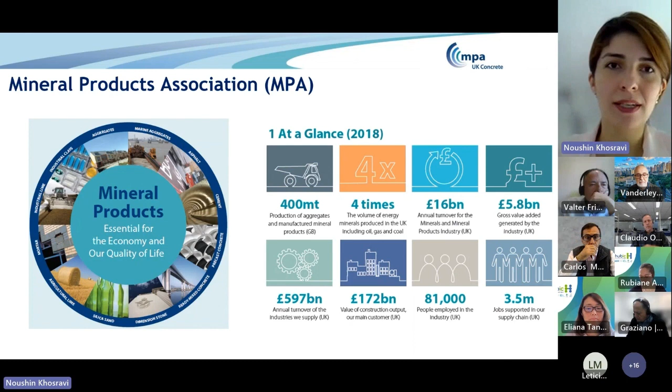Just covering a bit of basics - what is Mineral Products Association? For those who haven't come across MPA, we are the UK Trade Association for aggregate, asphalt, cement, concrete, dimension stone, lime, mortar, and silica sand industries. We have a growing membership of 530 companies, vast majority of SMEs, quarrying companies. We cover 100% of UK cement and lime production, 90% of aggregate production, and 70% of ready mix and also precast. As you can see, an important industry in terms of economy as well.

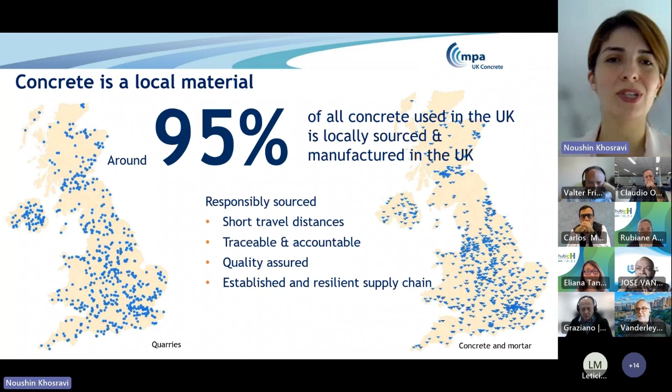Why UK concrete is really important - and I'm sure it's the same in many countries - concrete is a local material. This is important context because it has a domestic market, and it's a supply chain that is verifiable and responsibly sourced. What I mean by responsibly sourced, we can control the quality, we can avoid slavery, we can have good control of the supply chain. In terms of travel distances, it's very short, it's traceable, it's accountable, and it's everywhere within the UK basically. You can see on the map the dots showing where the industry sits. So UK concrete is a key part of the wider mineral product industry, contributes 5.8 billion to UK GDP, directly employs 81,000 people, and supports 3.5 million jobs.

Opa, tem alguém com o microfone aberto aí? Sorry, your microphone is open. It's okay, now, sorry.

Okay, so as you can see, sustainability of concrete can be a very wide topic because it has really big social impact within the UK, both social and economic. That's why I'm going to do an overview of all sustainability sides of concrete within this presentation. Why choose concrete? Most of you here are concrete fans, into the concrete industry. It's really important to deliver new homes, schools, hospitals, infrastructure with concrete, and important to protect communities, residents and buildings against threats of fire, flooding and changing climate. As I mentioned, it's sustainable, local, responsibly sourced, and really important for the UK economy. It can also play a role in innovation and advancement of technologies. Other benefits include climate change mitigation, sound insulation, thermal performance, and many others. So it's really, really important material.

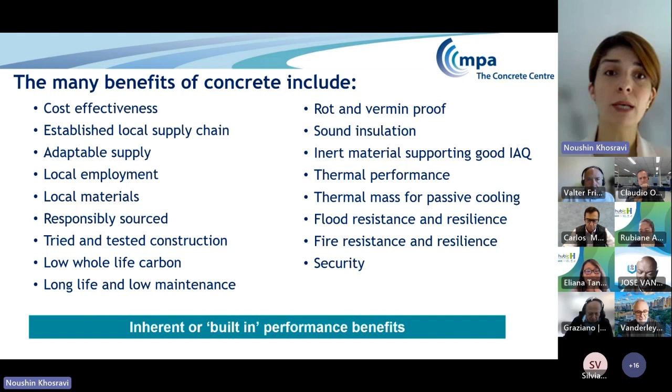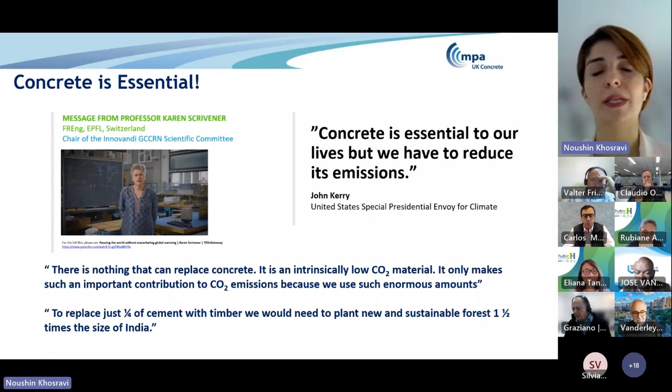I'm sure you are familiar with Professor Karen Scrivener. She had a talk a while ago where she mentioned a really important point: there is nothing that can replace concrete. It is intrinsically a low CO2 material - it only makes such an important contribution to CO2 emissions because we use such an enormous amount of it, which is really true. The volume we use makes concrete the second most used material in the world. She had an estimation: if you want to replace 1/4 of cement with timber, you need to plant new and sustainable forests 1.5 times the size of India. So we really don't have any other option rather than concrete at the moment. It's important to focus on its sustainability aspect, make it more sustainable, and reduce its emissions as much as possible.

So what did the UK do in general? From 2008, the UK concrete industry agreed a sustainability strategy and committed to deliver targets based on that strategy. The strategy evolved in 2012 and set targets for 2020, and at the moment we are working on targets for 2030. It's important as a trade association, as industry, to have these commitments, reporting and vision in place in order to measure, deliver, and plan for actions. The reporting side and the data is really a foundation for sustainability and any action we want to take forward. From 2008, the industry started to report on many different indicators.

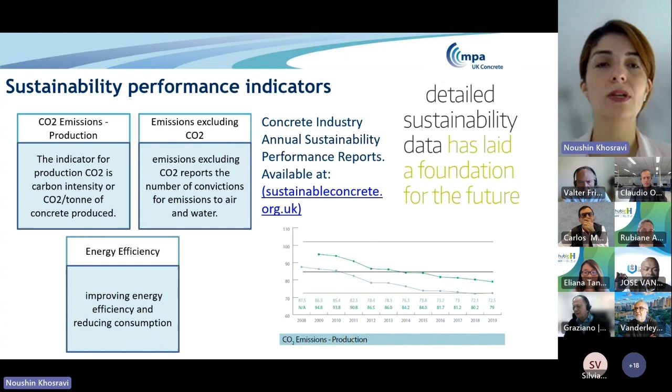I'm not going to go into detail on the indicators, just mentioning them basically. So the carbon emission and production, and emissions excluding CO2, as you can see in the graph, that's how we can show how the industry from that time has started to reduce its carbon emission, energy efficiency, and other sorts of indicators.

So these are more energy and carbon indicators, but it went further than that. We looked at environmental management systems, how we are reporting environmental management, what certifications exist, and how manufacturers can improve in terms of environmental management.

Resource efficiency - at the time, the concepts of circular economy that we are becoming more familiar with now didn't exist as much. So most concepts related to circular economy were defined here under the wording of resource efficiency and waste minimization, and that's how the industry started to measure its performance in terms of efficiency and waste.

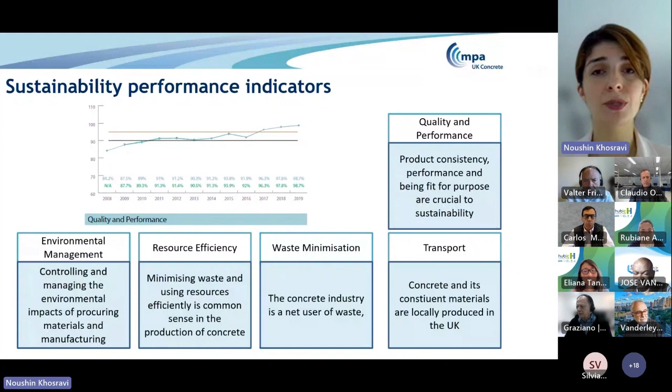And quality - transport is really important for emissions, especially on the aggregate side. And then water and biodiversity, again especially for the quarrying side of concrete production, a really important parameter. There's been great success through time with quarry restoration programs and achieving biodiversity net gain at the end of the quarrying program, which the industry has been reporting on.

Responsible sourcing, employment and skills, health and safety, and local community - also the social aspects of the indicators. In the UK we have BES 6001, which is a standard for responsible sourcing of material, and a lot of reporting has been done based on that.

So having said that we have been reporting on sustainability aspects and everything, obviously the commitment we have for reducing emissions is really significant and we are taking it seriously. So we are making more commitments to go forward.

Looking at carbon emissions specifically, a reduction in absolute CO2 emissions has happened since 1990, about 53%. If you look at the graph, this is more than the whole economy in the UK, which has been 43% at the 2018 baseline. The graph on the right shows the global contribution of the cement and concrete industry to emissions is about 7 to 8%, but in the UK it's about 1.5% - still a big contribution, but slightly less than the global figure.

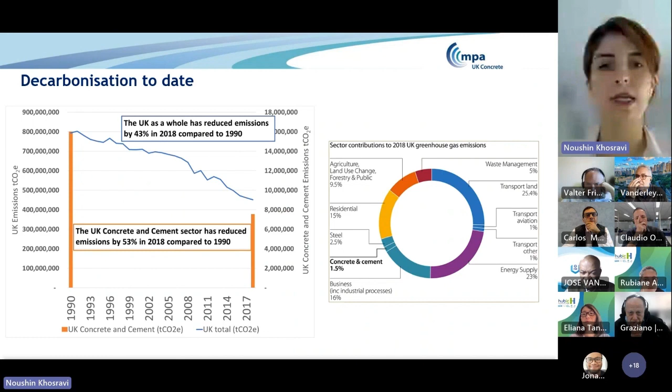This has happened through a lot of efficiency changes, changes in technology, cement production, and using supplementary cementitious material. But the industry knows we have a big challenge with process emissions in place, and there is still a lot to do to reduce emissions from cement production and concrete production.

I'm not going to explain how we produce cement - I'm sure people in the room are familiar with cement production. What I mean by process emissions is what happens when we heat calcium carbonate and the carbon side of it is emitted, and we can't really do much about that process side of it at the moment.

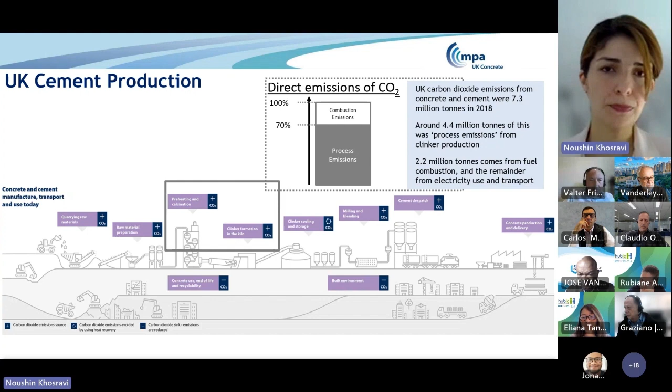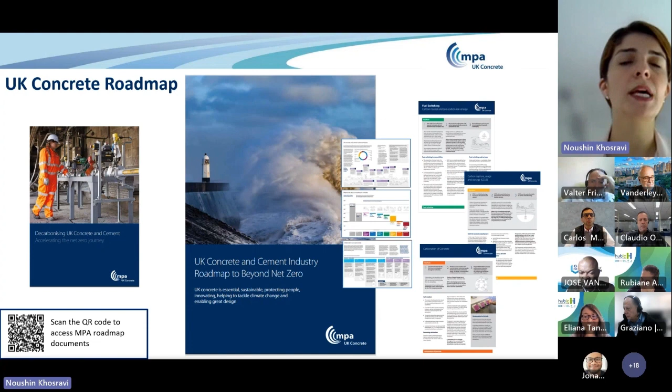But there's a combustion emission side of it where a lot is happening at the moment. So the UK Concrete Roadmap was published in 2020 with many lever papers explaining each part of it. If you look at the roadmap, it has 7 levers to go beyond net zero.

The levers are about indirect emissions from electricity, transport, low carbon cement and concrete, fuel switching, carbon capture, and then looking at the beyond-zero benefits of concrete, which is carbonation and thermal mass.

What I mean by beyond zero is that we are not counting the benefits of concrete in terms of carbonation for achieving net zero within the UK. But we know other roadmaps, like the GCCA roadmap, do include that carbonation.

Also, different roadmaps might have other levers, like efficiencies in structural design and construction, but this roadmap is very much focused on the manufacturing side and what can happen within the MPA environment. But we shouldn't ignore the other carbon reductions that can happen within the construction industry.

What I'm going to focus on here is more about the low carbon concrete side of it and fuel switching. Indirect emissions from electricity and transport are really important, but it really depends on government and availability of renewable energy in the grid to be able to use electricity, and also a lot of transport infrastructure is required to make that change.

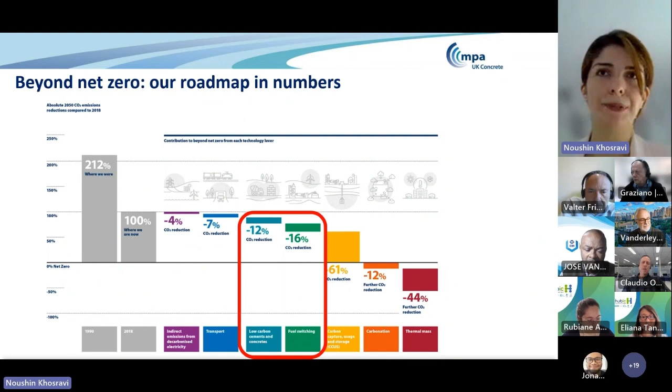If I focus on fuel switching, the fuel for producing cement is coming from fossil or waste biomass at the moment. 45% of thermal input to UK kilns is provided by waste-derived fuels, including waste fossil and waste biomass. 18.5% of thermal input to UK kilns is provided by waste biomass, and 609,000 tons of waste-derived fuels were consumed by the UK cement sector in 2021. This is important to consider both from the point of carbon emissions and from contributing to resolving the problem of waste in the country.

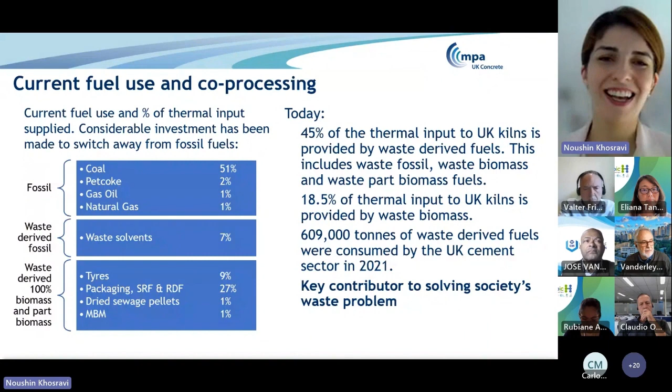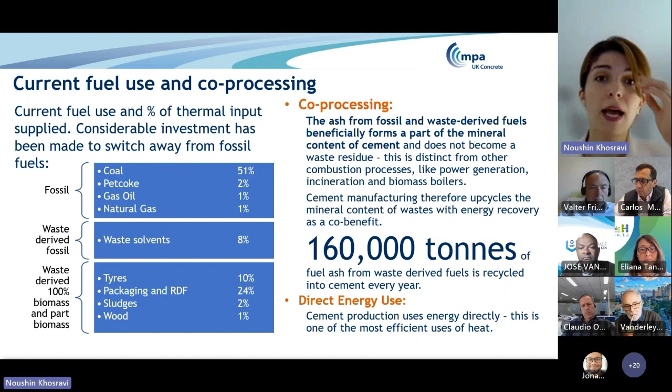There is also the co-processing side of it, which I think is more important from a circular economy point of view - the ash from fossil and waste fuels beneficially forms part of the mineral content of cement and does not become a waste residue. So there is basically almost no waste from cement production, and cement manufacturing therefore upcycles the mineral content of waste with energy recovery as a co-benefit. This is the number you can see about the tons of fuel ash from waste fuel recycled into the cement.

These are examples of some fuel switching and what type of materials at the moment are being used as waste in the program of fuel switching.

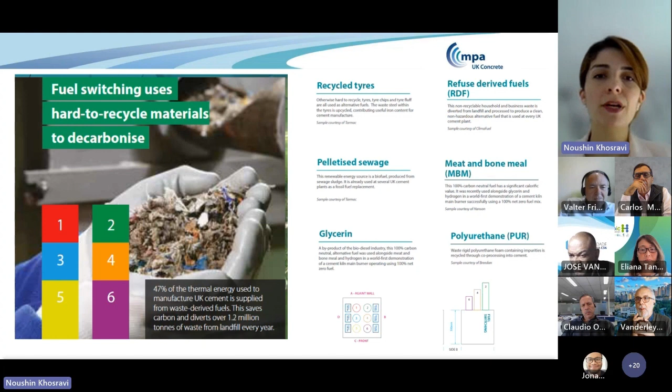But another side of fuel switching, if you want to see how that 16% reduction might happen - there are different aspects in there. There should be the supply of waste biomass available, so the roadmap expects 70% waste biomass will be available. Then efficiency of production and manufacturing is really important. And the infrastructure, especially for delivering hydrogen, should be there to enable that fuel switching to happen. If these things are in place, we believe by 2050 there will be a 16% reduction of emissions through just fuel switching.

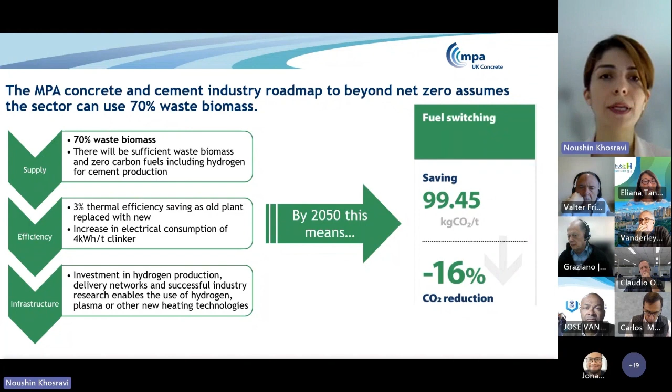How are we helping this to happen more? With partners, we had some trials going on with government-funded funding, partially for hydrogen, using hydrogen for basically producing cement. This was, and also plasma. This was a good demonstration that it is possible, but it also highlighted a range of challenges about hydrogen delivery and the efficiency of using hydrogen. We know the availability of the right type of hydrogen needs to be in place to make it happen. But this is a good step to show that it is possible for the industry to switch to using hydrogen. Then the rest is about having the infrastructure in place to make it happen.

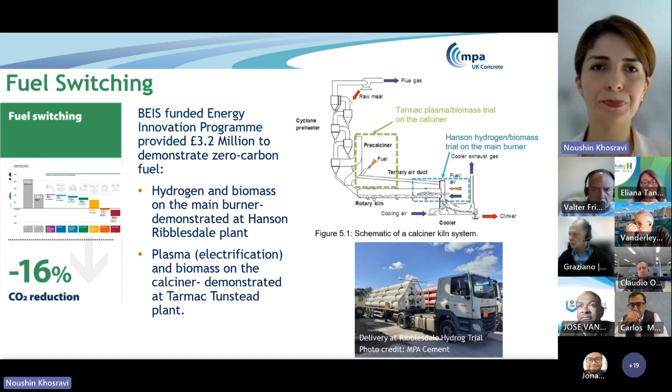If I move on to low carbon cement and concrete, as an overview, it's about clinker content, it's about innovation and research being in place, and how we work with the standards, how we can replace some of the cement - CEM1 as we call it in the UK - with other supplementary materials or additions, and how we help innovation go forward. We expect 12%, or actually even more we guess, will happen through using this lever.

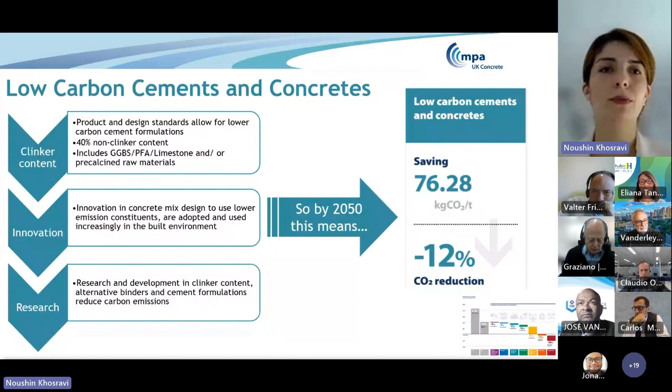I'm going to go into more detail about this. For low carbon concrete production and use, there are different aspects or elements to it. One will be supplementary cementitious material, alternative clinkers, how specifications and standards will keep up. Then efficiencies in design and construction, benchmarking and definition, and procurement policies that need to be in place. These two - efficiencies and benchmarking - as I mentioned, are not covered in the MPA roadmap, but there is the ICE low carbon concrete group, which we have been heavily involved with. We call it the low carbon concrete routemap. That covers that side of it. I'm going to explain about it in the next few slides.

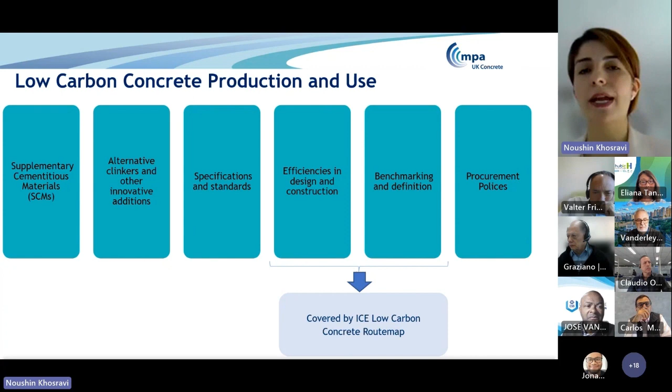Starting from supplementary cementitious materials, everybody knows that the highest emissions are coming from the cement side of it, and also reinforcement. The figures that I've mentioned here are slightly old.

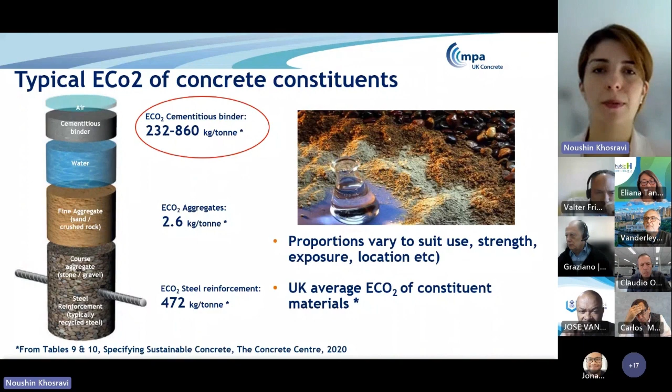We have recently published a new sector EPD - our average sector EPD for cement is 840, and the steel reinforcement figures are also changing and are lower. The new updated figures will be updated in our documents by the end of the year.

Using secondary cementitious materials, like fly ash, GGBS, limestone, you can see all the figures of the carbon emission are much lower.

There are lots of discussions about whether the figure of GGBS should include economic allocation from steel. This is an ongoing conversation within the UK. I think by the end of the year we will have a new, higher value for embodied carbon of GGBS, but that value will still be much lower than what we have for CEM1.

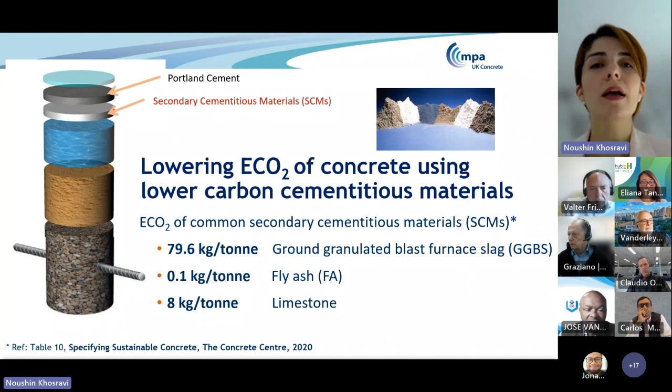So it still makes sense to use GGBS in concrete for reducing carbon. Looking at typical UK cement blends allowed in the standard at the moment - it depends how you compare it. If you're comparing with CEM1, there's a lot of opportunity: already 65% cement replacement is possible, with significant carbon reduction.

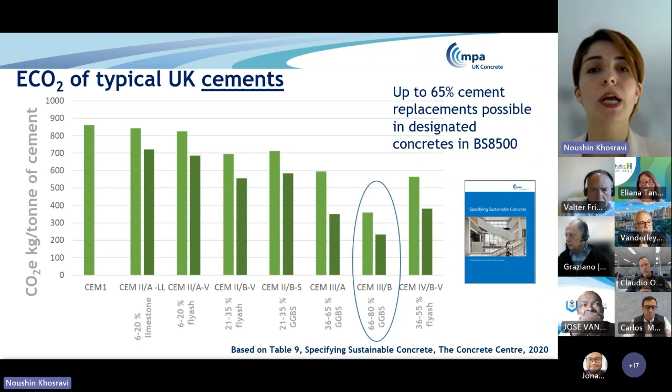But we know we are relying a lot on GGBS and fly ash, and we need to change the standards and work more to find other sources of material to use in the future. That's why we are looking at what other innovative materials could be part of our large-scale recommendations to the industry - how we can choose which material is best to use.

One of the most important parts of it is raw material availability - is it from waste or coming from natural resources? We would obviously be happier if it's coming from waste streams, because then it has a good impact on the circularity of materials and we don't need to damage any natural resources.

Is it local or imported? Local obviously has benefits - it has an impact on the social aspect and reduces carbon emissions from transport. So if we can find local material, that's better.

What's the CO2 mitigation potential? What's the scalability - is it at research level, pilot, demonstration? How can we commercialize this?

What's the impact on consistency of concrete and other properties - strength gain, durability? What would be the preferred application? What would be the impact on water demand and energy demand? How can we change the standards to make people use it? And what would be the impact on cost?

So there are a lot of criteria to really be able to recommend another addition or supplementary cementitious material to the market in the UK.

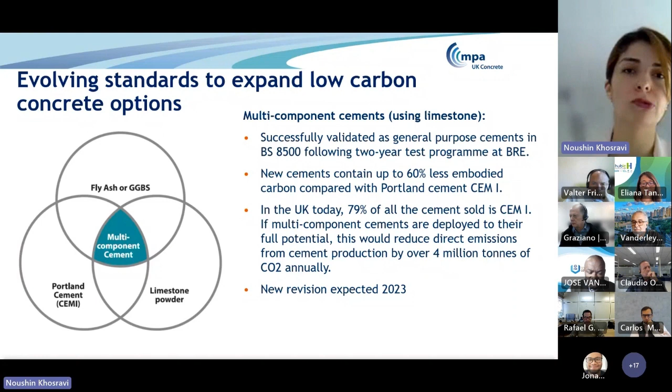Another project we are working on is reclaimed calcined clay cement. As I mentioned, we would like to use waste streams as much as possible, so this project is looking at clays from waste, from demolition, bricks, and seeing what would be the source of clay that we can use within the UK.

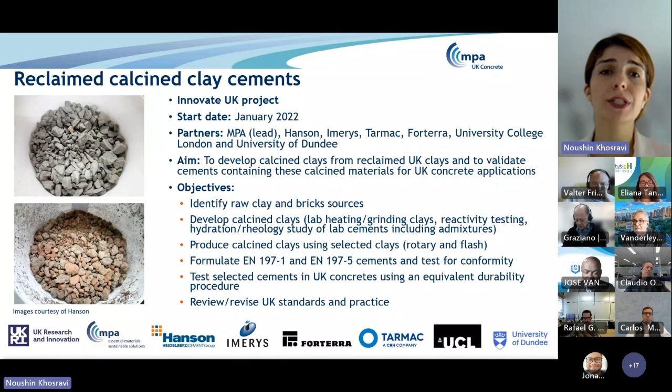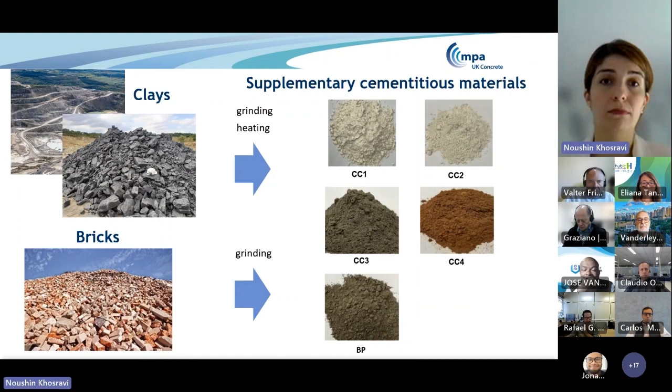We are looking at 10 different sources of clay and starting to understand their characteristics and the grinding process, heating, reactivity, and all sorts of tests that we need to do before being able to offer it to the market. So calcination and recycling is happening, and we completed the calcination.

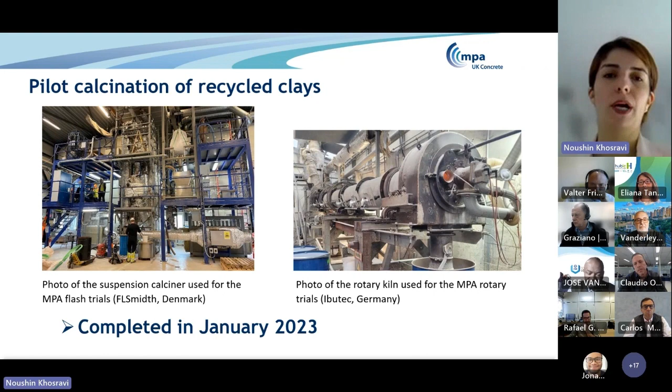The flash calcination or the rotary trial were all finished in January 2023. Now we will start a phase of durability testing to see what would be the impact and what proportions of clays we can use for achieving the right durability of the material.

So reclaimed calcine, as I mentioned, it needs a lot of work. We need to understand the characterization, the rheology, reactivity, strengths, and the impacts. It is a complicated process to find the right source of clay. But we are hoping in the next year we will finish this project and have recommendations in place about the source of clay.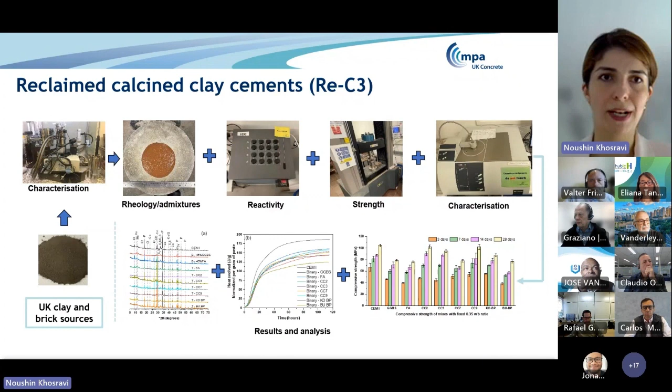Recovered PFA or fly ash is something we are also looking at. UKQAA is UK Quality Ash Association. Their estimation is over 100 million tons of recovered fly ash might be available, of which 40 million tons can have cementitious applications. So we are doing another project with University of Dundee to understand the characteristics of this stockpile fly ash and also its impact on durability. This will again open a big opportunity for using supplementary lower carbon solutions and being able to offer more options to the market.

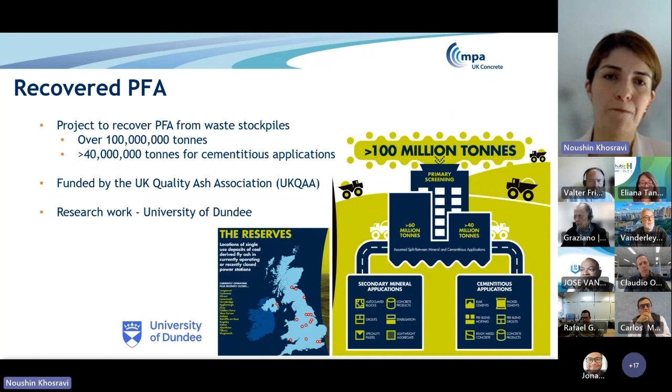Recycled building materials: EN 197 in Europe is looking at recycling cement paste. It hasn't started in the UK, but we are thinking we should look more seriously into that. I think EN 197 is looking at up to 20% replacement of cement being allowed within the standard. So we think this is a good opportunity and it's on our to-do list in the future to look at it.

Other natural pozzolans, of volcanic origin, really depend on the country. There is not much available in the UK. If anything wants to come into the UK, it will be imported from other parts of the world, and it's up to our members to decide to import it.

In terms of sedimentary products, natural clays, for example, there are major projects looking at natural clays, like London clay, as they're excavating for a project and thinking how they can use that clay. It's not within the remit of MPA at the moment, but when their project finishes, it will have an impact across the whole UK and be another offering to the market.

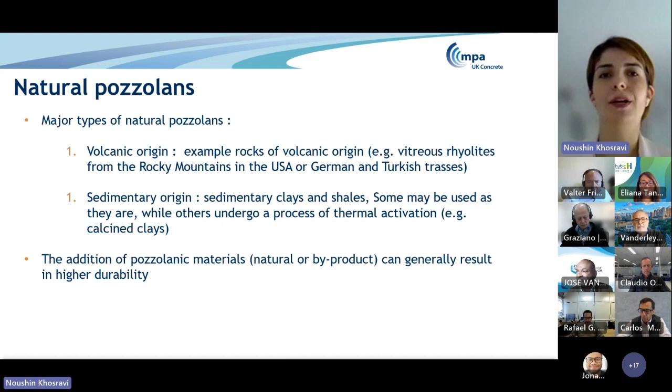Generally, natural pozzolans or even waste pozzolans, we think they will have a good impact on durability. There might be some challenges with workability and stuff, but there's not much concern about having a negative impact on performance.

So alternative clinkers or niche cements, there is a lot happening in terms of innovation in this area. Geopolymer or alkali activated binders are being used now in the UK. Many different companies are offering that. The problem with these geopolymers is the high reliance on GGBS and fly ash, but most of them are also looking at activating calcined clay, which is a more abundant material.

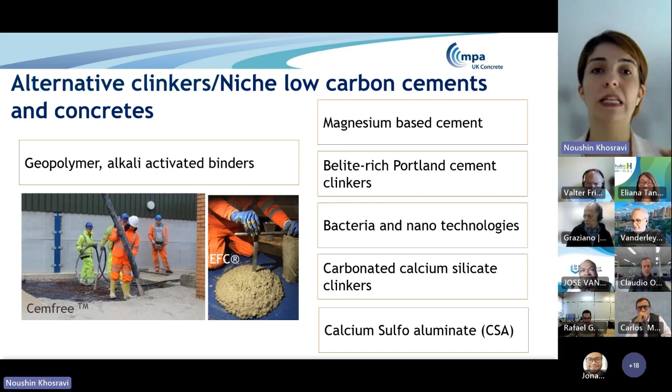But there are other alternatives. I'm not going to read the list for you, but we consider them more of a niche cement, which might have a special application. Most of them are not really commercialized yet. Having said that, we should still look at other innovative possibilities, because there is no silver bullet to resolving carbon emissions, and maybe all these bits and pieces can contribute to carbon reduction anyway.

And then there are other innovations everybody is aware of, like self-healing concrete, graphene enhanced concrete. They might not directly work in terms of carbon emissions, but they improve performance, so maybe a lower volume of concrete will be used, for example with graphene enhanced concrete. So they will have some sort of indirect impact on reducing emissions, and it's really important that as MPA we support all those innovative products coming out.

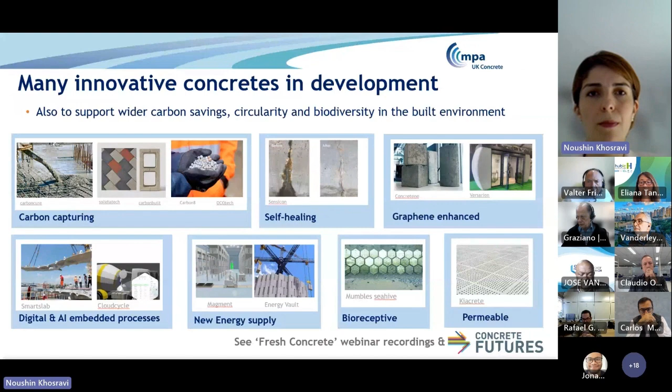So this was about the materials itself. But the specification and concrete standards are really, really important. That can actually be a major obstacle to innovative materials, because we don't have long-term performance data, and they are not compliant with European or UK code. So it's difficult to use any new material, even if they become commercialized.

That's why we think performance-based specifications are really important to replace some of the BS 8500 prescriptive approach. But the performance approach is less mature and it still needs a lot of testing.

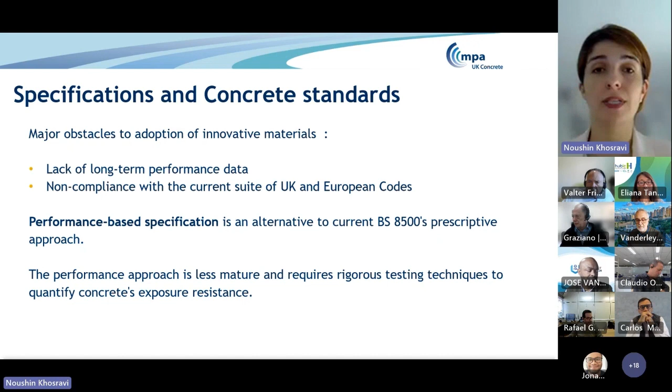So the low carbon concrete group that we are part of, and MPA Cement is also funding this work, is the BSI Flex Standard project. It's called Flex Standard because it's going to come out a little bit faster than the normal technical committee reviews that BSI standards go through. So if it's achieved consensus, then it is assumed that it's okay and it can come up.

This Flex standard is going to be a performance standard, and it's going to tell us how to demonstrate the suitability and the level of testing information required to use a new technology, a new innovative technology. Our estimation is by 2025 this standard will be available in the UK, and it will facilitate use of new technologies and lower carbon solutions which are not in the traditional UK concrete standard.

Having said that, we are developing a new standard, a performance-based specification, but we think it's really important to look at what we are using as a standard now, the BS 8500, because it was published like 20 years ago. Since then, there has been improvement, for example, in cement quality and water reducing admixtures. At the time it was written in the context of durability mainly, and carbon was not as much on the top of the agenda.

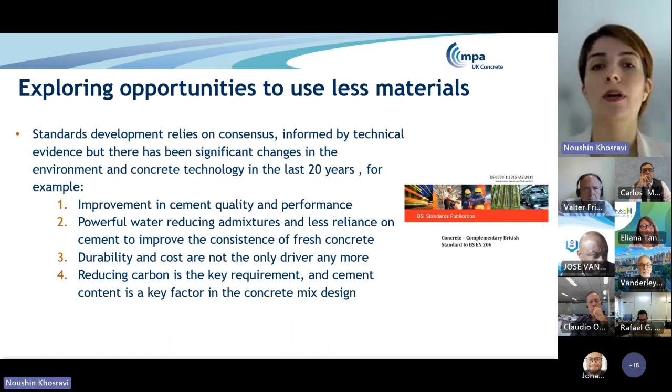So there was not much concern about the volume of cement that is being used within the standard. This standard has limiting values that connect the water cement ratio, the cement content, and the strength together. So it's really important if we can review this standard in the context of carbon, maybe we can actually relax some of the requirements and use less cement. Finally, we will have a better lower carbon solution.

That's why MPA funded a desktop study, a review with Mott MacDonald, to look at basically the history of BS 8500, our concrete standard, and understand is there any possibility, any evidence that we can reduce and relax this, for example, cement content requirement. And the report is now finished.

Mott MacDonald looked at the history and evolution of BS 8500, looked at international standards and how they are specifying concrete, and has come up with a list of recommendations and evidence that a lot of requirements can actually be relaxed. This is what we are taking to the BSI committee, which is the standard committee within the UK.

And proposing these changes to relax some of the requirements. Probably they will ask for more testing to prove it, and then we will go and get some funding or work with people who might be interested to get involved to do the testing. Then if this relaxation within the standard happens, we expect a lot of — I don't have an exact percentage of how much reduction will happen — but there will be a big reduction in the carbon emissions of concrete.

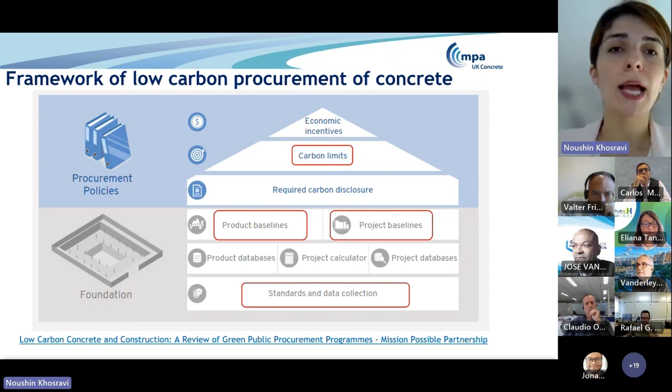So standards of life cycle assessment have been growing and being refined for a while. At the moment in the UK, EN 15804 is the most acceptable standard for producing EPDs and life cycle assessment. So it seems that the standards are picking up, getting ready to help us measure and report our carbon emissions better and more accurately.

So data collection or carbon disclosure, as I mentioned, MPA has been disclosing the sector carbon emissions, but then looking at EPDs at the product level, manufacturers or even contractors or designers can disclose this data. Then for products, this baseline will be the current industry average based on strengths, for example. So EPD, as I mentioned, is really important, is the fundamental step to be able to reach that sort of policy requirement and setting policies for carbon.

So as MPA, we are producing sector EPDs, like our average country sort of EPDs for selected ready mix, masonry, and precast products.

We want them to be third-party accredited, so you can rely on that. So it's a big work for us to produce that sort of average industry EPDs.

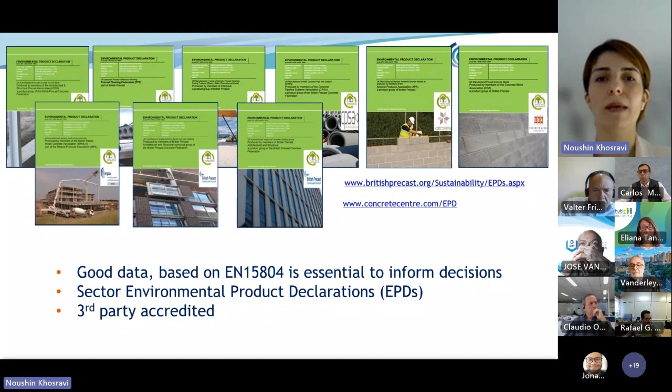The ICE low carbon concrete route map that I've been mentioning since the beginning also looked at a wide range of recommendations for the value chain, from clients, from contractors, and the supply chain, on what they can do to provide the right data and reduce carbon. One thing they published, which got a lot of attraction, was the benchmarking of concrete based on strengths.

This is something that I think worldwide, probably the first country that produced this sort of benchmark. It's probably similar to what you can see on your fridge or washing machine in terms of A to G energy efficiency of that product, and it would give you a little bit of confidence. If you are in the red zone, it means it could be better—a bit higher carbon—but if you can come lower and lower, it's obviously better.

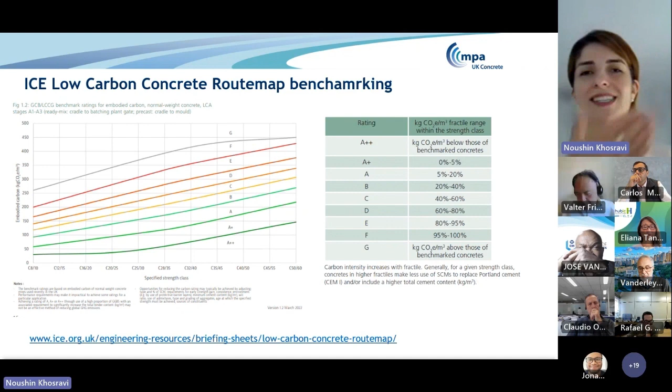This is based on strengths and shows the carbon emissions. The plan for ICE's low carbon concrete group is to update this annually to show the status of the market for that year, or actually the year before, because the data comes from the last year.

So this would be the product baseline, but we understand the project baseline is also really important, because you can't have just a product baseline. For example, you choose a very low carbon, low strength concrete, but you use a big volume of it. If you're not looking at the project or building level, you would lose sight, and at the end it would be a higher carbon solution.

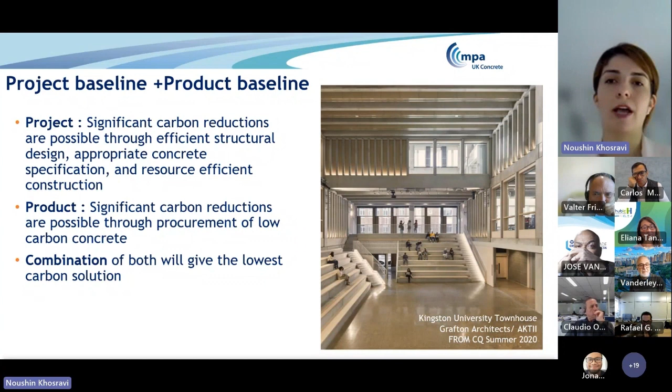That's why we think the project baseline and product baseline should be together—we cannot look at one in isolation. That's why the UK Net Zero Building Standard is also looking at benchmarking and setting limits and targets at the building level. I like their graph explaining this.

It explains what is a benchmark, what is a limit, and what is a target. They say the benchmark is the current sector average; the limit is the maximum performance level that must not be exceeded—for example, for a product there should be a limit of carbon, and if the product is higher than that carbon level, it shouldn't be used. The target is the best performance, or the minimum performance level that must be met or ideally exceeded.

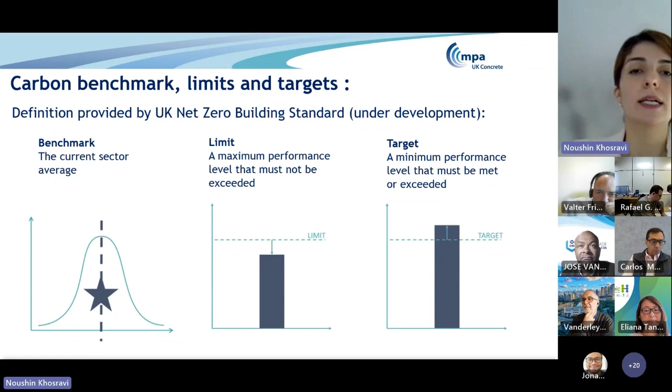An example of enabling these limits and targets can be mandatory product standards. For example, if the government decides that any product higher than G level is banned from the market, that would be a mandatory product standard. But ideally, as an industry, we would prefer a voluntary product standard—something like ICE has already produced—that can help, incentivize, and encourage people to use lower carbon solutions without banning a certain product.

At the building level there's the UK Net Zero Building Standard I mentioned. There's another standard for future homes that's going on. And recently, the science-based target also mentioned a guide they're producing, and a consultation going on for building science-based targets, which is another important thing to consider.

As MPA, we are more involved in the product side of it. That's why I'm going to explain a little bit more about the voluntary product standard.

So the voluntary product standard, or that LCCG concrete benchmarking, will help practitioners define low carbon concrete. Then it will incentivize and accelerate adoption of low carbon concrete. It will set the benchmark and help set the target, and then you can also report against the benchmark.

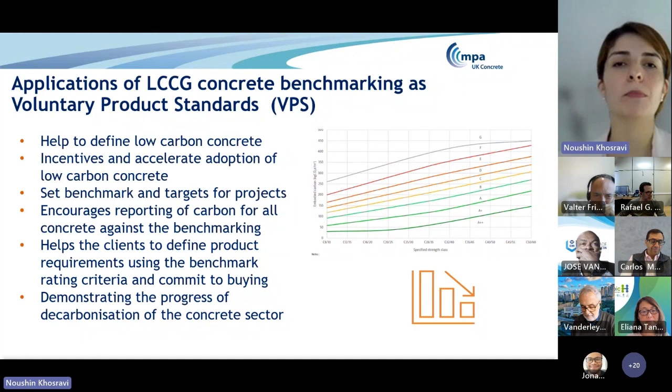So how is MPA supporting this benchmarking activity? As I said, we have disclosure at the sector level with our reporting, but we also collect data for LCCG benchmarking, that's the low carbon concrete group. At the moment, it's based on just ready-mix data.

I should mention we are aware that for concrete it's not the best approach to look at just strength and embodied carbon, because the application and the exposure condition make a really big difference about what you choose for concrete.

Even the regions matter. For example, if in some part of the country the quality of aggregate available locally is not that good, you might end up using more cement, and you can't do anything about it—you will have a higher embodied carbon of concrete. So if you want to compare it with just the strength benchmarking, it will not fit in there as a low carbon solution, but it's a low carbon solution for that region.

So we understand there are lots of shortcomings with this current benchmarking, but it's a good starting point.

Another challenge we have is, as manufacturers, we cannot provide that data about application, because our members would know what they produce, but they wouldn't know exactly how it was used. They'll have some idea, but they wouldn't know how much went to a pile or how much went to a column. So the application data should really come from the contractor side, and they need some tools and planning in place to record all of that correctly and be able to communicate that to the benchmarking, to make it more accurate.